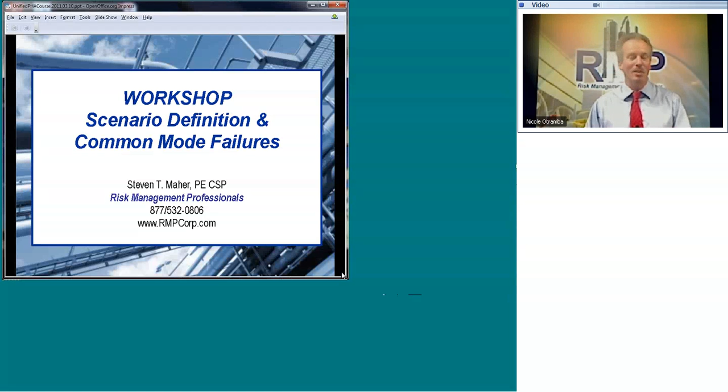So let's talk about what we've done in the past. In previous modules, we've looked at the history of PHA techniques, process safety management, and risk management programs. How do you find the optimal approach for the project you're working on? It really makes a difference. Are you in the design phase, or are you operating a facility? If you're in the design phase, is it the feed stage of the project, or are you in detailed design? Where you're at and what you're trying to accomplish makes a big difference in terms of the kind of techniques you choose.

Something else that's not part of our Hazop facilitation series is another oral presentation we're doing at the Global Congress on Process Safety next week, on inherently safer designs. A lot of those issues in terms of how to apply these techniques and address ISD issues are very important to consider if you're trying to lead a team to look for potential weaknesses in the design. If you're interested, that was a webinar we gave on March 1st, available on our website. If you have any trouble finding any of these things, as always, give us a call.

Where you're at in the design cycle makes a big difference in terms of the techniques you pick. We went through all those in a previous Hazop study facilitation module: how to maximize the study's usefulness, tips on how to maximize quality, and a little bit about consequence analysis, because it's important to understand the phenomenology of what's happening when you decide on Hazop study scenarios and prepare appropriately.

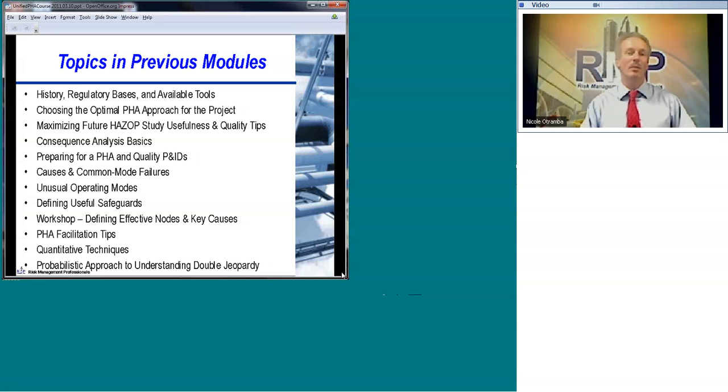So what we're going to cover today is looking at the evolution of heater and heater burner designs, looking at the design bases, current design standards, and how design standards, analysis, and all these things fit together. We'll also look at key improvements to heaters and what's happened over the years.

With a bit of an interactive approach in our webinar, I want to look at different vintages of heater burners, show you the progression, and show you how that translates into a lot of the analysis techniques, and how this evolution in protection systems has actually had an impact on the overall safety of heaters. So we're going to look at very simple systems, then the evolution introducing pilots, automatic isolation of fuel gas.

We'll cover separating control and protection systems, redundancy and diversity, and then recent additions with automatic double block and bleed systems that a lot of people are now applying on the pilot gas lines and also their fuel gas lines. At the very end, I'd like to draw some conclusions, and as always, if you guys have additional insights or things to share, we'd love to get that input.

No matter what, I've been teaching Hazop studies since 1986, and for all those years of doing this, there's always something to learn—new techniques, new ways of doing things, new designs, new approaches to handling things like protection system design, or even introducing inherently safer design features.

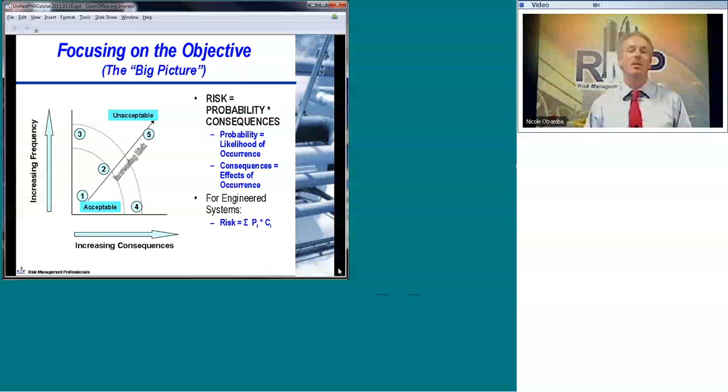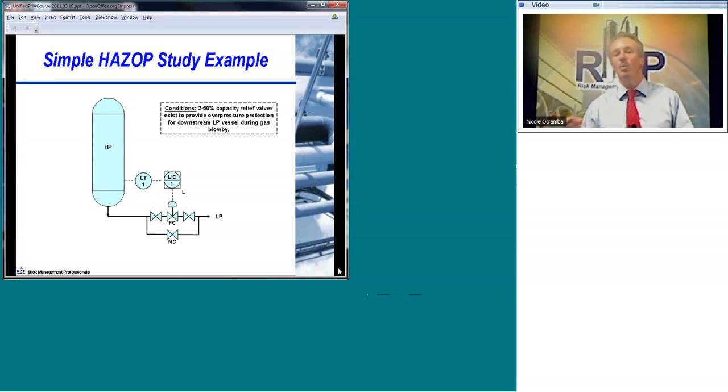As a quick example, here's a high-pressure tank feeding a low-pressure system, on level control. What can go wrong here? A key thing in investigating that is to use the deviation matrix for a Hazop study. You combine operational parameters such as flow, temperature, pressure, and level with guide words such as no, more, or reverse, and combine them to look at deviations—no flow, higher level, higher temperatures—to drive you toward what scenarios can lead to potential problems.

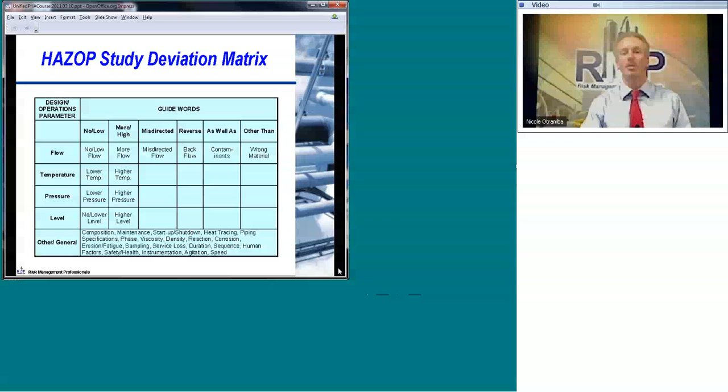Then you cycle through this, asking about the process deviations, potential causes, potential consequences, developing scenarios, and as you're doing that you risk rank it, get an appreciation for its importance. Then you can make a good judgment, usually with the team—in fact it should be with the team—on what's important and whether there are weaknesses that need to be addressed. So this is a cyclic approach, scenario by scenario, meant to be a very thorough technique for this kind of evaluation.

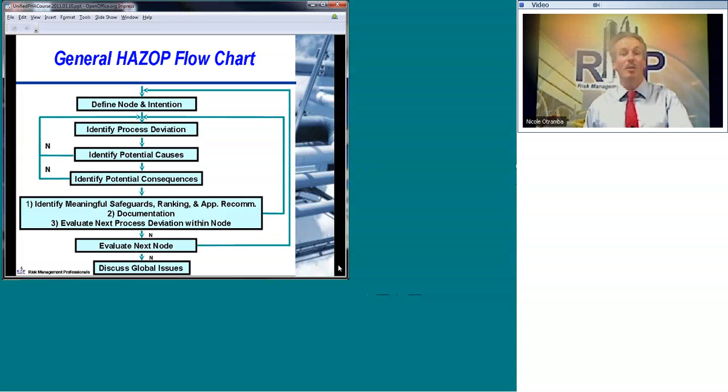How do you handle common mode effects? Again, in the safeguards column you'll usually document if you've got a transmitter or something that may be common to the causal event, and also the safeguard you'd like to take credit for. You should be considering that in your evaluation of the risk ranking and overall importance of the scenario.

If the team understands and can keep up with you and you can document it simply like this, great. If you need to take it and make it into a separate scenario, use that—it's a powerful way to get people's attention on really key issues. If you're the engineering contractor coming in as a facilitator, as many of us do when helping clients with the job, you want to make sure they clearly understand it, and that it's clearly documented so somebody can pick up that document later and work back from the team's conclusions—did they really understand, are there common mode failures or common transmitters?

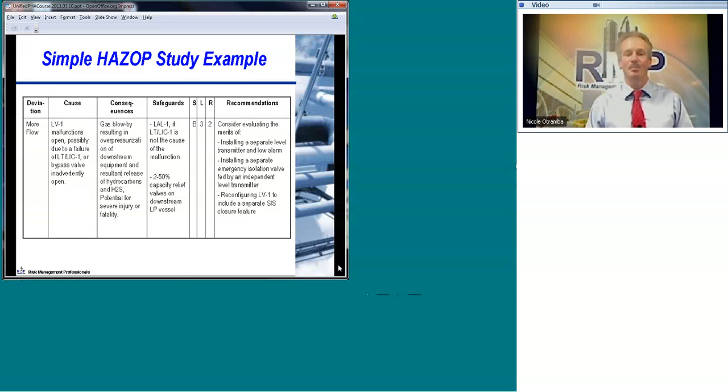So that's where you're trying to go from that overall objective of looking for weaknesses, from a simplified P&ID which illustrates the function of the process, and translate that into something that looks at weaknesses. That's the overall framework for the Hazop study.

So what I'd like to do now is shift gears—this is the main theme of this presentation we're doing next week at the Global Congress on Process Safety—looking at heater and heater burner designs, their evolution, and how techniques such as Hazop study and LOPA help you really appreciate whether there are weaknesses that need to be addressed.

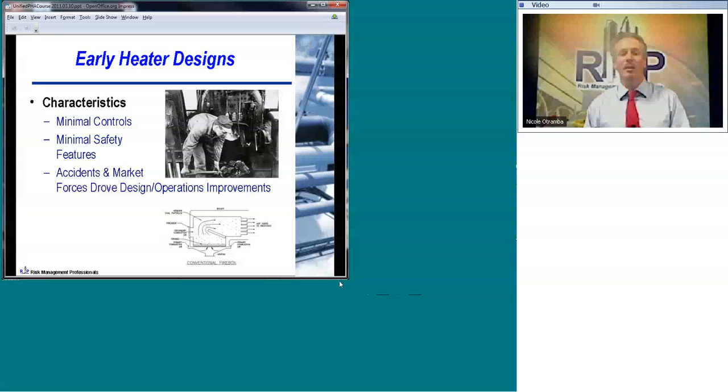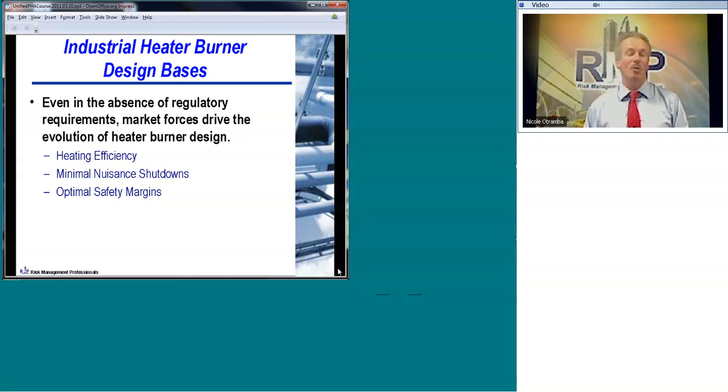So what are the design bases for heaters? Even in the absence of regulatory requirements, market forces drive this - heating efficiency, minimizing nuisance shutdowns, and optimizing safety margins. These are things that drive design improvements, both in efficiency and operation of the heater, and with respect to safety. Along with that, in parallel, design standards evolve.

You'll recognize most of these that have various bits and pieces from the control and protection design to the metallurgy and types of processes you can use on these industrial heaters. So there's a parallel evolution of market forces that drove this towards more sophisticated technologies, the need for more sophistication in heater design, and along with that came standards.

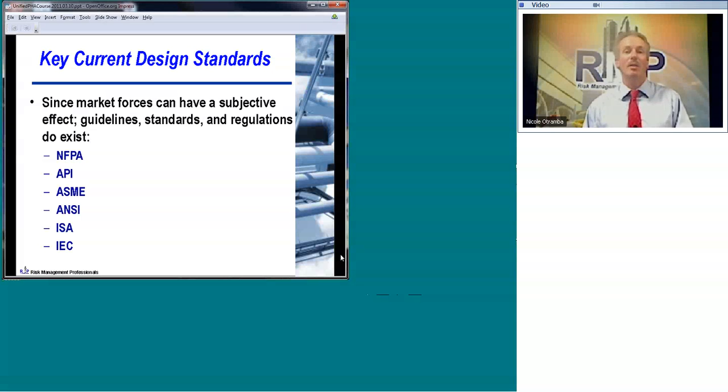So the design, how you operate it, the analysis, all keep pace with guidelines, standards, and regulatory requirements, and they're all cyclic. As you keep pushing the limits on heaters to get them more efficient, using new process materials with temperatures, pressures, and chemicals that require exotic metallurgies, all those work together driving the technology and sophistication we've seen today.

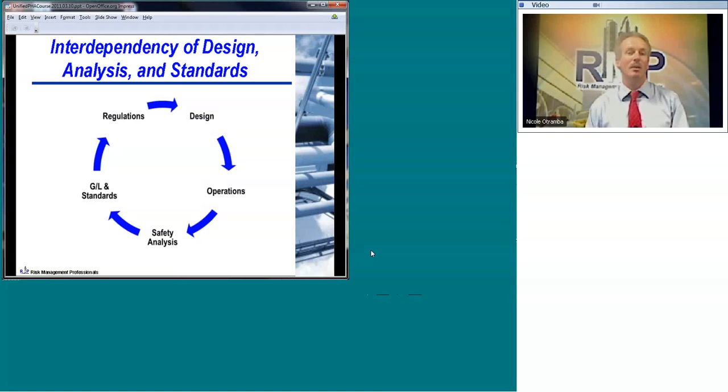Instead of actual safety improvements, you've got a big mess on your hands where people think there are safety devices and protection features, and there really aren't. So the evolution of heater designs has to address availability improvements, make sure heaters do what they're designed to do, decrease nuisance, decrease risk, and keeping pace with that decreased risk has to be decreases in nuisance trips.

A lot of what's happened in the past two decades with respect to the evolution of control and protection features - the introduction of microprocessors, fault-tolerant sensors, voting logic, and things built into these devices - have really worked together towards improving safety, decreasing risk, and minimizing the potential for nuisance trips. That's what we've seen with heater design over the past decades, accomplished through various applications of control and protection systems.

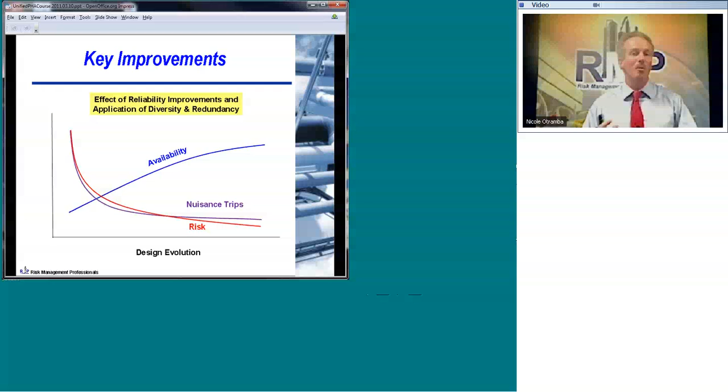That'd be really cool. So what I'd like to do is start working with you to look at some of these systems and how that translates into Hazop studies and other different burner designs.

Basically, you've got a feed coming in. It's on flow control. You've got a fail-open flow control valve for reasons that will either become obvious during the session or you already know about. You've got a manual bypass. It gets split into two passes, and as it goes through the heater and comes out, its outlet temperature is measured, and that's used to regulate fuel gas supply, so you're coming out with a hotter process material than what goes into the heater.

The temperature transmitter on the outlet feeds a signal to a controller that feeds air to a diaphragm on a temperature control valve that's modulating the flow of fuel gas into the heater. Very simple, very basic design.

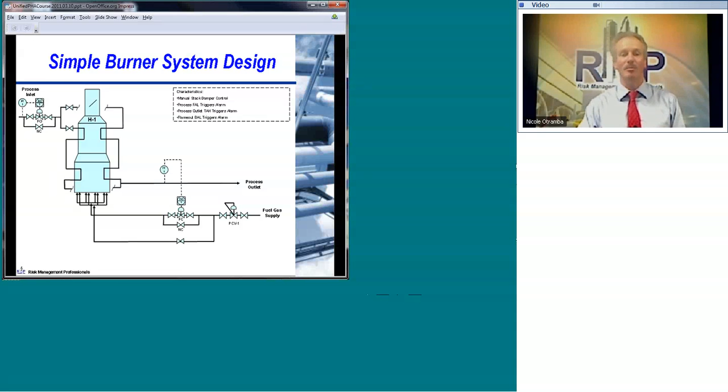There's rich mixtures in the firebox, excess firing. We talked about potential tube damage. Flame impingement can occur under cases where you've got either forced or natural draft conditions and significant amounts of excess fuel gas.

Tube fouling: if you have excess firing, buildup of carbon deposits on tubes or some other means of fouling, it can generate hot spots that lead to tube failure and release of the process materials into the firebox. Now, what are the process materials?

If you're talking about flammable materials, it can feed the fire, burn down your heater, or cause some other significant problems. If you're talking about toxic materials, it can result in toxic materials coming out the stack and going in places where you weren't expecting them to, and maybe some potential for serious injury.

We talked about loss of process flow that could lead to tube failure. Contaminants in the fuel gas supply can also cause problems with heaters, and we also talked about flameouts. So what kind of causes are associated with that?

All of you have in front of you a copy of that simple burner design with the flow control on the inlet, the temperature control on fuel gas, and also the pilots. So what sort of things do you need to look at there? What kind of causes do we need to look at?

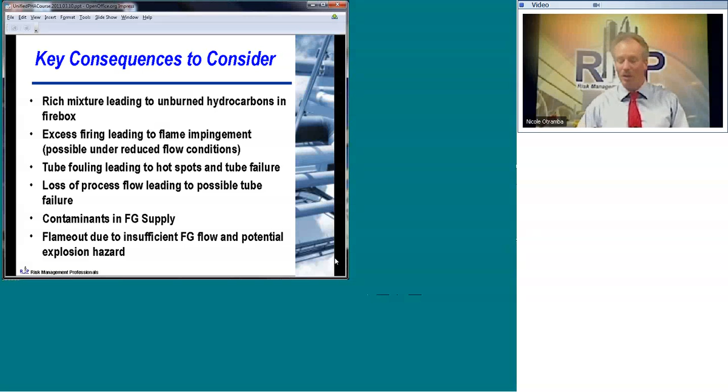So these are the kind of things that you'd want to look at with respect to causal events during the Hazop study. And I've taken the liberty on the next slide, which will be passed out and sent to you after this module, of key causes that you'd want to look at. Now, I took the liberty of abbreviating them for our presentation.

When you document a Hazop study, we have talked about documentation in previous modules. You'll want to spend a lot of time elaborating that, looking at failure modes, and making sure it's crystal clear, and prolific use of tag numbering to make sure that all the information is there and it can be deciphered later.

Here we're talking about the flow control valve malfunction closed or failing open, the pressure control valve that's supplying fuel and pilot gas failing closed or failing open. It's just a self-regulating valve, so that's how you document it. The temperature control valve failing closed, and the pressure control valve failing closed. All those things are key causes to consider, as well as tube ruptures.

Maybe you've got inappropriate metallurgy, and over time, it's just going to become damaged. I've also done Hazop studies where I've seen tube pressure ratings below the actual operating pressure that they're operating the heater at. Over time, they switched out a heater to another service, and they started charging it with more pressure than it was originally designed for. Nobody had bothered to take a look at that or implement management change appropriately. So looking at tube rupture, talking about tube metallurgy, various design conditions, very important.

Also the stack damper. A lot of the more modern heaters where you're really trying to economize the operation will have various forced or induced draft implemented on the heater. For a lot of the older heaters, even manual control, you still have to look for what if the stack damper is closed or fully open, and what does that do to your heater.

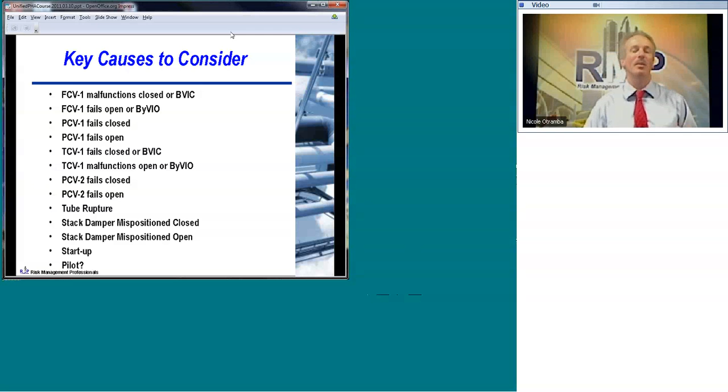All right, so that looks at a simple burner design, and we're going to get into some quantitative results of how these pull together in just a few minutes. Let's talk about some other features and how they would be treated.

The next thing I'd like to look at is another design evolution issue, basically automatic shutdown of the fuel gas. When do these things come about? They come about in a lot of cases because somebody's had an accident, and the guidelines and regulation standards are responding to that, not trying to predict what's going on, but reacting in a response mode to the problem. But one of the first things, the early designs did not have a lot of these shutdown features because they wanted to maintain heater operation, maintain the process at all costs. After accidents and after guidelines and standards came about that called for this, they started looking into automatic shutdown features on fuel gas.

Some of the early and very simple ones were a simple interlock like you see in the center bottom of your screen for TCV1, TCV being the temperature control valve that's feeding fuel gas into the firebox. Basically, it's just a simple solenoid where the instrument air that powers the valve goes through the solenoid, and the solenoid opens and you dump instrument air and close the valve. It's a fail-close valve, so when you lose instrument air, it closes off. That was one of the early design additions that allowed for some sort of automatic shutdown.

Now, what was the solenoid tied to? It's not drawn here, but in the upper right-hand corner under characteristics, as well as the various alarms associated with flow, temperature, and flame-out conditions. As they had these automatic shutdown features, they'd have a low-low condition on flow, a high-high condition on temperature, or a low condition on your flame, basically a flame-out condition, that would trigger opening of the solenoid, dumping of the air, and closing of that temperature control valve.

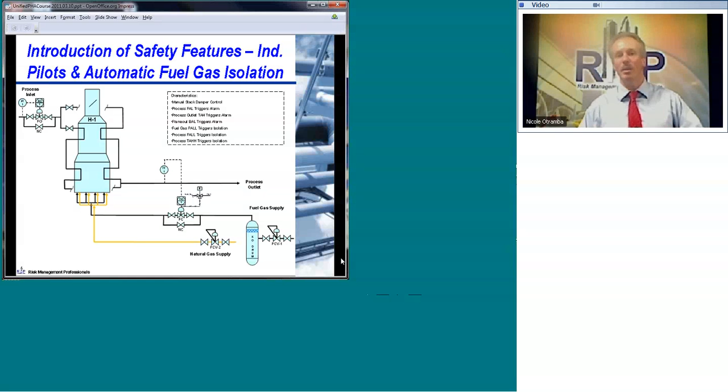Again, as you're documenting all these in the Hazop study, they go right into the safeguards table. There's room there to do more than just document it. If there's common mode failures or potential problems, make sure you make note of that. And I'll show you how that pulls together quantitatively in just a couple of minutes.

Okay, next, separation of control and protection systems. As I mentioned before, end devices using the same transmitter, over time people realized that valves can stick, transmitters can fail. You talk to a lot of folks back in the 80s and 90s about what could go wrong here, and you'd ask about the temperature transmitter.

They'd say, oh, that never fails, it always reads just fine, and they maintain it annually. Well, what did they do annually? Did they do a functional check? If you're only operating one heater for a year or two, you really haven't had enough length of time or a statistically significant population of heaters to draw conclusions about the reliability of the transmitter in the first place. So there was a lot of false sense of security for these transmitters and some of the early devices that came out.

People realized over time that they really needed to move towards a separation of control and protection. That's depicted very simply here with the temperature control valve number 1. Upstream of that, there's a separate isolation valve, XV-3, that's a fail-closed valve held open by instrument air, and if the solenoid is de-energized and trips and vents the air, the XV-3 will close. Having separate signals, separate transmitters, and also a separate end device meant that you took out a lot of those common mode failures.

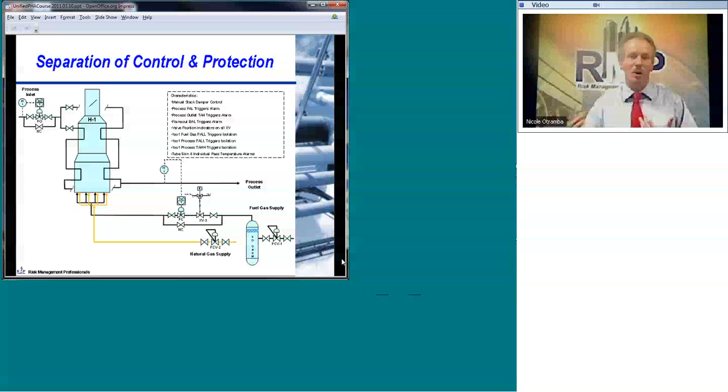This reduced the potential for one problem to cause the event and disable your key protection features. Here your control device is still TCV-1, and your protection feature is XV-3. It's separate, and it provides a very significant improvement in the overall reliability of your protection features. Let's take a look at one more design feature, and then let's look at what that's doing to overall reliability.

You can have the same problem with a rich mixture in the firebox, no combustion taking place, and if this rich mixture in the combustion zone gets into an area where it can find an ignition source or a hot spot, you can touch off a significant problem, a significant overpressure event in a heater. If you've seen a heater where that's happened, the sides have basically blown off, and if you're lucky the superstructure is still there and there's nobody nearby to get hurt. So what they realized is that you need to have positive shutoff of pilots.

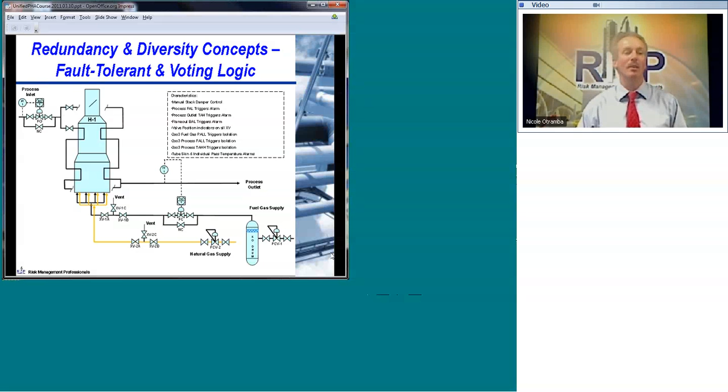Right before we get into that, some of the other advanced features that we're not going to get into today are forced draft, induced draft systems, automatic damper controls, sensor diversity, and also some emergency response features such as snuffing steam.

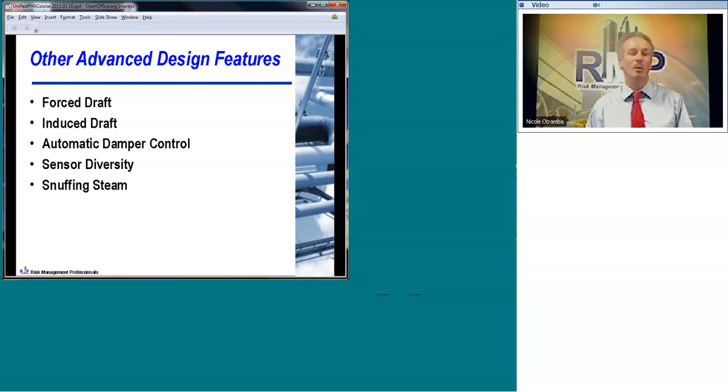Configuration number 2 was automatic isolation of the valve by dumping the air to the valve. Number 3 is separating control and protection systems. And number 4 is the introduction of reliability and redundancy voting logic for a lot of the modern systems.

Let's first look at loss of process flow that can cause flow stagnation or under low flow events, excess firing, and tube failure. As we talked about before, that could be an initiating event such as FCV-1 malfunctioning closed, or a block valve inadvertently closed, or possibly driven by the flow transmitter.

Keep that in mind. For the early burner designs, what's the key protection feature? It's a low flow alarm. And that low flow alarm is good except for one thing.

You've got a potential for the flow transmitter that can actually fail high and say, I want to throttle back on that flow control valve. So let's go ahead and take a look at that flow transmitter. And if it does do that, you've also disabled your alarm.

So in a condition where the flow alarm works, using some simple values that are commonly used for LOPA, you might get a factor of 10 improvement in safety, and basically your protection system has a 9 in 10 chance of working, or 1 in 10 chance of failure.

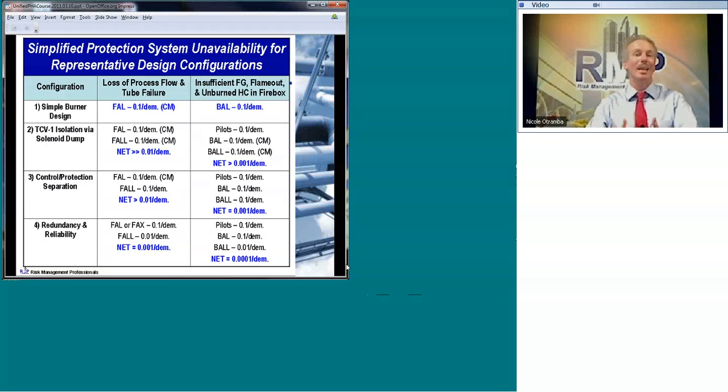So this slide, I hope, ties together the kind of things we've looked at for different designs, how you document Hazop studies with respect to listing safeguards, being very careful about common mode failures and looking for things that can go wrong with the system, and also how you handle it with the team. If the team doesn't want to identify the device, that's fine - you just list it and note that you didn't include it because of potential common mode failure. If they insist it's a wonderful protection feature that's been used for 10 years and never fails, go ahead and put it in, but note its potential for common mode failure. When risk ranking and driving the team toward identifying weaknesses, make sure they understand how the system is set up, the potential for common mode failures, and what truly represents independent functions and system reliability.

All right, that should tie together a lot. I hope that ties together quite a few things.

What I'd like to introduce is a special topic: automatic double block and bleed systems. It's kind of the same concept introduced in the 80s, following a lot of injuries that occurred at refineries because people didn't manually double block in. It was commonplace back then to simply isolate with a single valve and call a contractor in to work on the equipment. Well, they leak, they may not have been isolated properly, and people get hurt.

So they started adopting, for a lot of designs, especially with higher pressure systems, a double block and bleed manual system - closing two isolation valves and opening a bleed or vent in the center, depending on whether you're dealing with liquids or gases, allowing the pressure to decrease so you know you've got positive isolation and the system can be worked on safely. That was a manual device introduced into designs a couple of decades ago.

Well, recently people felt, why not make it an automatic feature on a heater? So that was that complex drawing I showed you last, with those double block and bleeds on the fuel gas supply and also the pilot supply. Let's take a look at those implications.

Just to run through this, here's an example of the evolution of these independent shutdown features. Configuration A is just a simple single shutdown valve, like that third drawing I showed you earlier. Configuration B is two valves to provide a little more reliability isolation. Configurations C and D are this automatic double block and bleed, which is commonplace in many designs, with one minor difference between C and D. Depending on how the designer set this up - and we'll talk a little more about that shortly - they've sized the valve and located the vent either for just safely releasing the volume between the two isolation valves, or safely releasing an entire flow case when you've got full flow conditions on that vent valve.

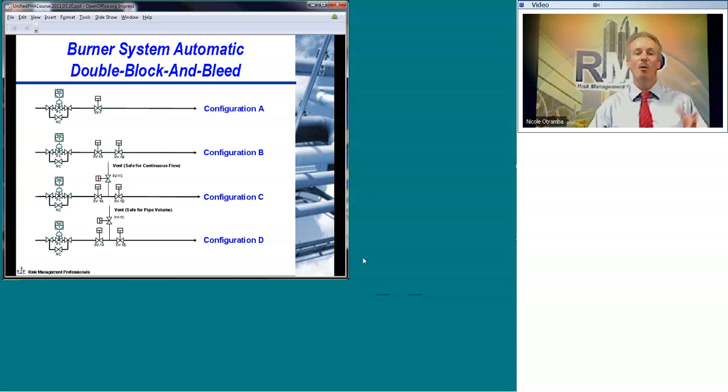So let's talk about that a little bit, and use some of the... oh, by the way, you'll see this in the printout that you get as a follow-up to this training module, the kind of failures you need to consider. I'd like you to make sure you think about these things during your Hazop studies if you're facilitating with this kind of configuration.

Bullet number 3 is what I was talking about, where you've got the automatic bleed valve failing open during normal operation - a single failure. Or another way to accomplish that same flow is if the block valve fails to isolate on demand, with the block valve that's in the main flow path, with the vent valve open.

Basically, it's two separate conditions. The first portion of this condition is a single failure. The second portion is a double failure. And we're going to focus on the single failure - they tend to be a little bit more important.

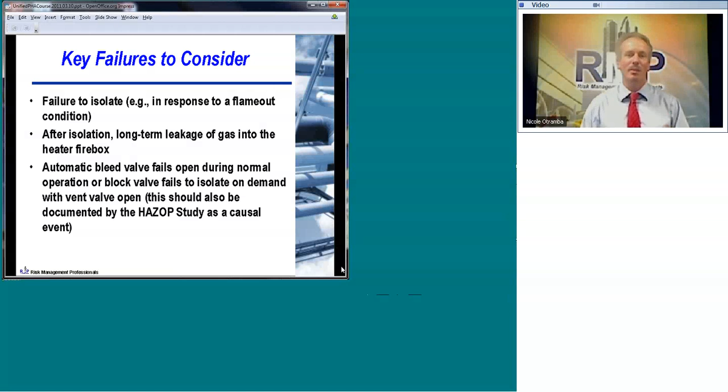So let's look at how that translates to numerics and some of the concepts we've picked up, using Hazop studies, defining safeguards and common mode failures clearly. Even though you can get into a lot more detail quantitatively, I wanted to use simple values that are used in LOPA to illustrate what you need to look for and consider. I'm not saying every design is the same - every Hazop study, every installation at a plant site is different, but certain things should be considered.

Well, configuration A was the single isolation valve - very simple. That single isolation valve adds another decade of reliability, or decreases unreliability by a factor of 10. So you get a 0.1 per demand improvement on that. There's a little footnote at the bottom with our assumptions: if we're assuming you've got a flame-out challenge of 1 per year, and between pilots and alarms you get a 0.1 per demand protection on that, then basically you're looking at a 0.1 demand of a flame-out condition where you need this protection - this isolation of fuel gas - to work properly. And so that's where you get the net heater explosion frequency of 0.01 per year.

Let's look at configuration B. Configuration B is the two independent isolation valves. Well, if each one gives you 0.1 per demand of protection, but they are two isolation valves - they may be maintained by the same person, they may have some common signal processing - you need to look at that. So there's some potential for common mode failure there. Not saying it's significant, it depends on the design, but you want to at least consider that.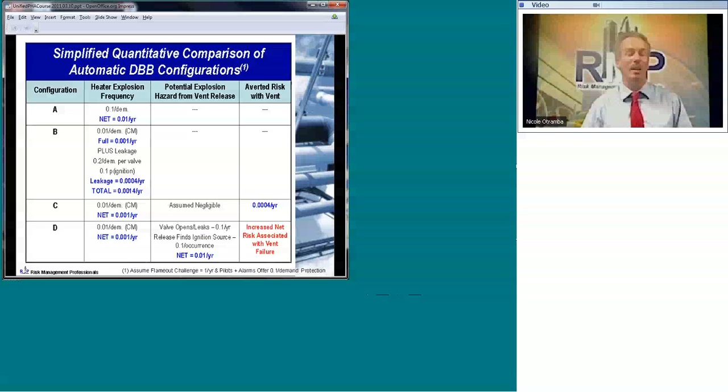Okay, so what kind of things have we looked at? Basically, we have seen the evolution of industrial heaters and burner designs. This is giving us dramatic improvements in availability, decreases in risk, and also decreases in nuisance trips. It is feasible. Things have really improved over the past couple of decades.

As a facilitator, you need to make sure you carefully consider common mode failures and have to clearly document them, and make sure the team understands.

When you're trying to achieve acceptable levels of risk, make sure you apply active safety systems, but recognize they can reach a point of diminishing returns.

For those of you who do LOPA, just as you don't want to take credit for multiple alarms if the same operator action takes place as giving you independent protection layers, if you've got additional bells and whistles, alarms, transmitters going into equipment, additional signal processing, but you're still reliant on that one potentially unreliable end device, you really haven't improved things dramatically. Adding all those things or listing them in your safeguards column can mask the fact that there's something else going on here.

In a lot of contemporary applications, you need to look at other safety management systems issues: mechanical integrity, operating procedures. Even recently, with a fairly new design at a local refinery, the operators disabled the interlocks during startup because they were more comfortable starting it up manually. They blew the heater apart, had an injury, fortunately not serious, but it was very unfortunate and totally unnecessary.